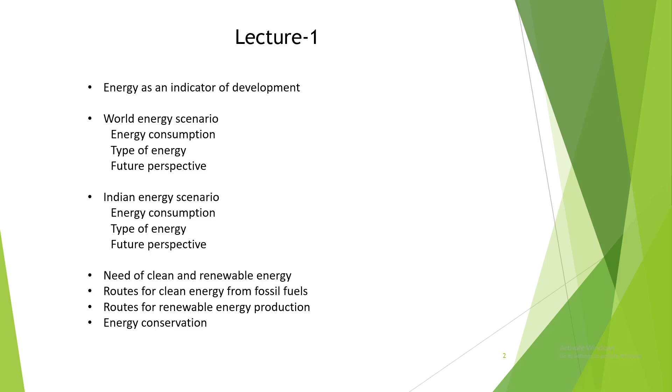Okay, if there's no doubt, then move to the second lecture. The second lecture majorly focused on coal as a basic energy source - its basic composition, origin, rank, energy content, and different types of coal such as anthracite, bituminous, lignite, peat, and their availability worldwide and also in the Indian market - what kind of coal is available in India, and how that affects energy production and electricity generation from it. Also, the different properties and pricing of coal, and finally the energy production perspective from coal. These are all discussed here.

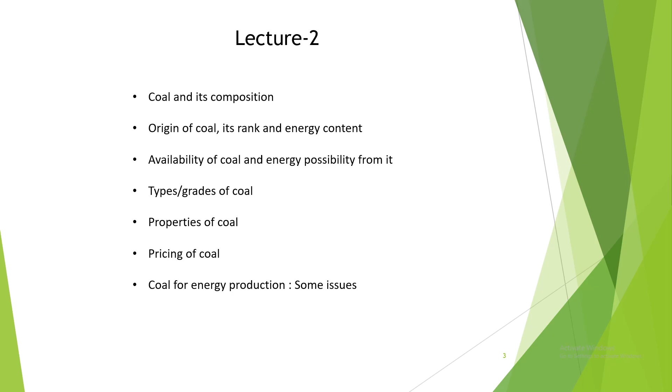Again, if there is any question, I'd be happy to resolve it. If not, then the third lecture was basically the characterizations, like the proximate and ultimate analysis of coal, and also the calorific value estimation of coal via a bomb calorimeter, with some numericals discussed. The proximate analysis gives us the moisture content, volatile matter, ash content, and fixed carbon, whereas the ultimate analysis gives us the elemental composition such as C, H, N, S, and O, the basic elements of a hydrocarbon. Also, for energy production from coal and electricity generation, we need to know how much energy can be produced from coal when burning it, so the calorific value or heating value estimation by bomb calorimeter experiments are also discussed here.

Furthermore, the fourth lecture discussed a coal-fired power plant, where there is combustion of coal and power generation, and also the overall plant efficiency - Carnot efficiency, Rankine cycles, Brayton cycles, these kinds of thermodynamic cycles are also discussed - and overall performance of a coal-based power plant, how to quantify it based on efficiency and based on energy production in terms of kilowatt hour, and then also some of the IGCC cycles, which are newer technologies. These are also discussed, along with some basic fixed bed and fluidized bed reactors and their process conditions and efficiency.

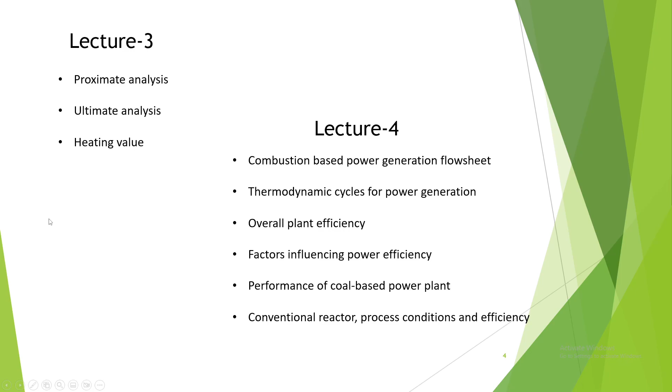Moving on, we'll discuss some sample questions, basic questions, which are also provided as assignment 0. The first question is: the Kyoto Protocol is related to what? CO2 reduction, solar energy, water management, or women empowerment?

Let's do this in an interactive way. What do you think it would be? Anyone? Yeah, it's CO2 reduction.

That's correct, this is very simple. The Kyoto Protocol is related to CO2 reduction, which is nowadays the basic theme of climate change actions, to reduce the carbon level in our atmosphere, which can be correlated to global warming. The target is to limit the global temperature increase to below 1.5 to 2 degrees Celsius.

The next one: in India, the cetane number of diesel used in trucks may be about what? 5, 14, 45, or 85? 45. Yes, the correct answer is 45. The cetane number of diesel basically shows us the performance of the engine.

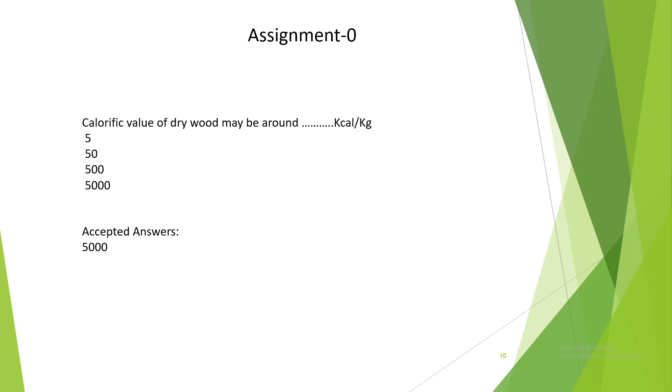Another question in chat: do we have to remember such calorific values? I don't think so, but for some basic ones it would be better knowing the range, especially for multiple choice questions, in a comparative way.

That's why I'm saying this, because the next question is: the calorific value of LPG gas is around what? 1000, 5000, 10,000, or 12,000? When comparing, it's actually far greater than dry wood. So it's not very mandatory to remember detailed numerical values; it's just a brief introductory way to know the basics of energy.

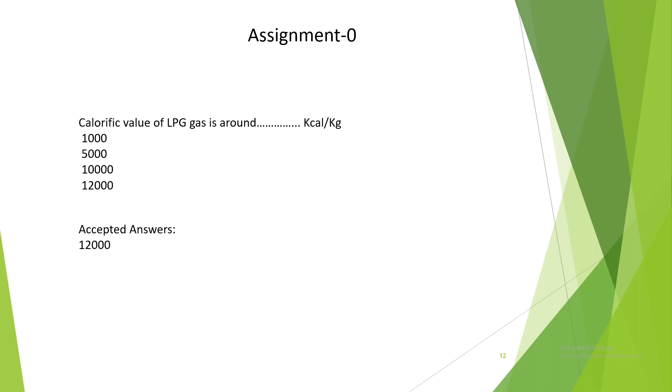Another question: which of the following is called blue gas? Coke oven gas, water gas, natural gas, or producer gas? Water gas. Yes, that's right. It's water gas, which is actually very important from an industrial perspective.

The LPG constituent gases, four options: methane and butane, methane and propane, butane and propane, or propane and pentane? Butane and propane. Yes, that's the correct one, butane and propane.

The next question: which of the following sources is responsible for maximum air pollution? This is based on pollution control board data. The options are industrial chimney exhaust, forest fire, automobile exhaust, or bacterial action. It might be a bit controversial, but it is what it is. What according to you would be the highest responsible thing?

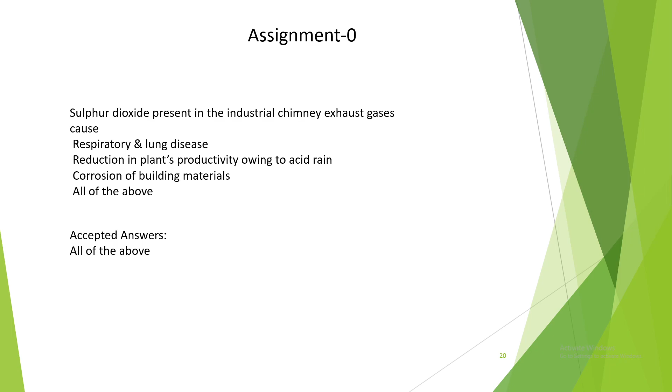The LED bulb consumes more than how much percentage less energy than the incandescent light? 50, 100, 75, or 25?

So the correct answer is 75% less energy consumption when using the LED bulb compared to the incandescent light. That is why, even if the capital cost or market price of the LED bulb is far greater than the conventional light, the longevity of these LED bulbs and less energy consumption are the main reasons why LED bulbs are getting more and more used everywhere, because overall the cost, and this energy consumption correlates with cost. So from an overall cost perspective and sustainable development point of view, LED bulbs are very good.

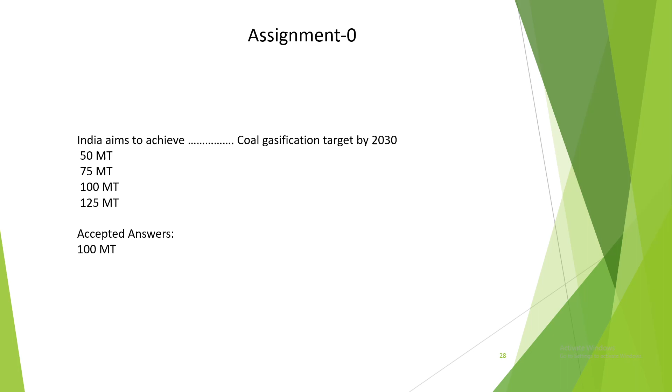The largest wind energy production state in India - is it Gujarat, Rajasthan, Maharashtra, or Tamil Nadu? It is Gujarat, the largest wind energy production state, in terms of overall renewable energy, also wind energy, along with solar energy, biomass energy, and tidal energy. It's a very important aspect, especially in coastal areas or windy areas at a certain height where you can see these windmills. So Gujarat has the largest wind energy production so far within India.

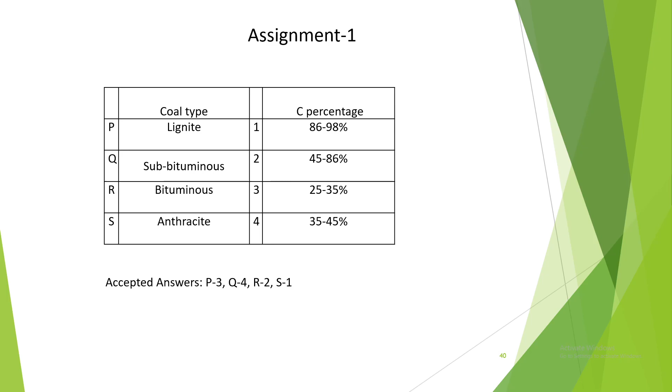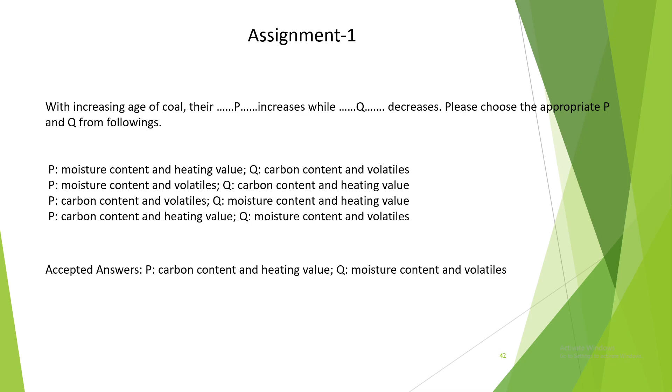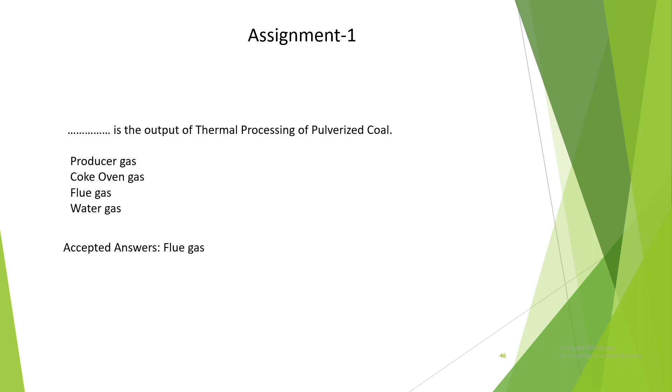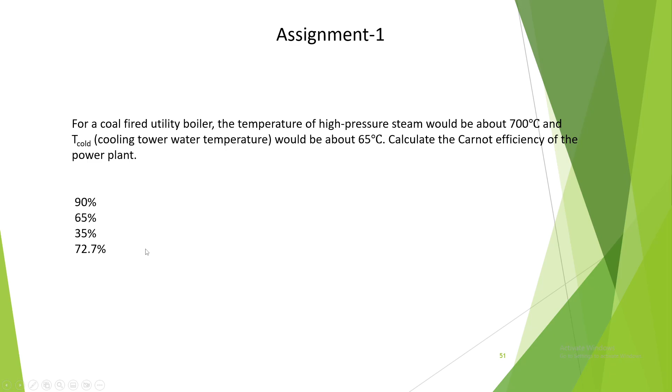So the correct answer is 65%, not 35%. You have to be very careful about converting both the cold and hot temperature to the respective Kelvin scales, and then simply apply 1 minus Tc by Th into 100%, and you'll get about 65% as the correct answer.

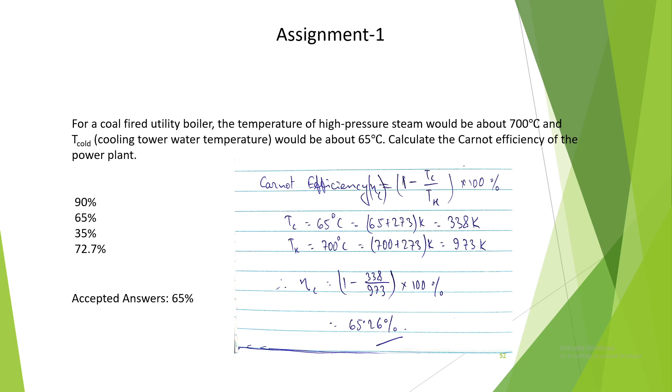Another numerical problem. If everyone is done with the previous one and there's no question on that, let's move to the next problem.

It's the calculation of the water equivalent of a bomb calorimeter, having a 1.5 gram benzoic acid sample whose higher heating value is given, with an overall temperature rise of about 5 degrees Celsius, and the acid titration required 12 ml of standard alkali. The standard alkali means a certain concentration solution, which you'll see in the lecture as a normal solution. Also, 8 centimeters of wire was consumed in that particular firing. We have to determine the water equivalent of the bomb calorimeter.

These kinds of practice problems, and also whatever you have in your assignments, are very important, even when planning for the final examination. So you have to be very careful about that. Please solve this problem, and then we'll discuss it.

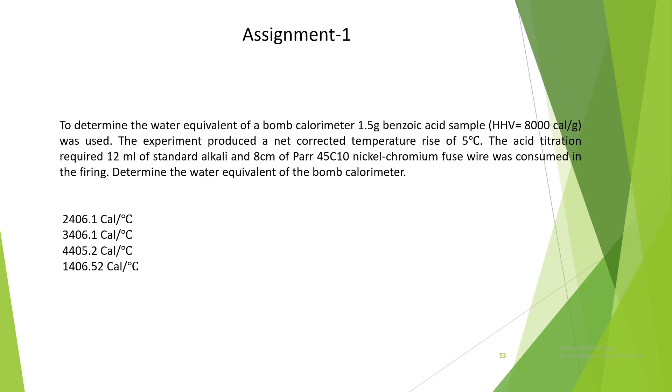Okay, so the correct answer is 2406.1 calorie per degree centigrade. How to solve this problem? This has already been shown in the lecture, but I'll explain again. Basically, when you are heating or combusting any sample in the bomb calorimeter, there is a temperature rise, sensible heat obtained by the bomb, and also some heat obtained by the water itself. So there is m*cp*delta T, m bomb into cp bomb plus mw into cpw, and overall there is a certain delta T, a certain temperature increase.

So this entire m*cp bomb plus m*cp of water is actually called the water equivalent. When trying to get the water equivalent value, we get this formula: higher heating value into the mass, plus E1 plus E2 plus E3, divided by delta T. Now what are E1, E2 and E3?

E1 is the HNO3 correction factor. Basically, if there is some nitrogen present, there will be some HNO3 formation, and we have to correct for that heat. Accordingly, if there is some sulfur present, there will be H2SO4 formation, so we have to get that H2SO4 correction factor too.

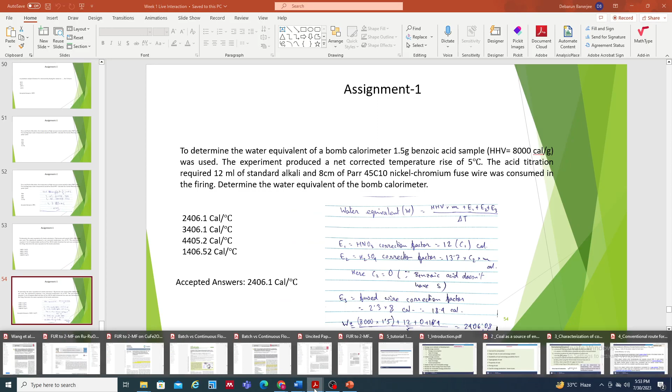So for nickel chromium fused wire, the factor we take is 2.3. In the lecture slide, this has also been shown - you can see the 2.3 is the factor for nickel chromium fused wire. When using some other iron fused wire, that would be 2.7, or for finer platinum wire, the E3 value would be 0.

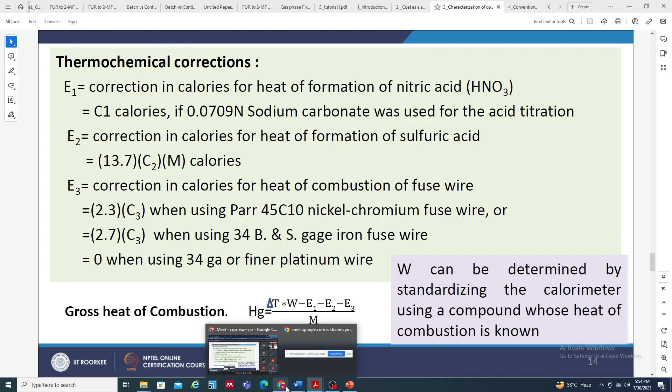So for nickel chromium fused wire, we use this 2.3 value as the factor, and 8 centimeters is the consumption of wire. So putting all these values into the water equivalent formula, and delta T is 3.077 degrees Celsius - don't worry about Kelvin versus Celsius here, because this is delta. So when calculating and putting in the value of delta, it's the same whether in centigrade scale or Kelvin scale.

Ultimately, you will get a value like 2406.08 calorie per degree centigrade. I wrote it wrong - it's not calorie per gram, it's calorie per degree centigrade.

Another question is that, if there is no doubt in the earlier numerical questions, we move on to another question.

Okay, I assume there is no problem in solving those numericals.

During a boiler trial, the coal analysis on mass basis was reported as carbon 62.4%, hydrogen 4.2%, oxygen 4.5%, nitrogen 0.4%, sulfur 0.2%, moisture 14.4%, ash 13.9%. If the ash molecular weight is 56, what would be the higher and lower heating value on as received basis?

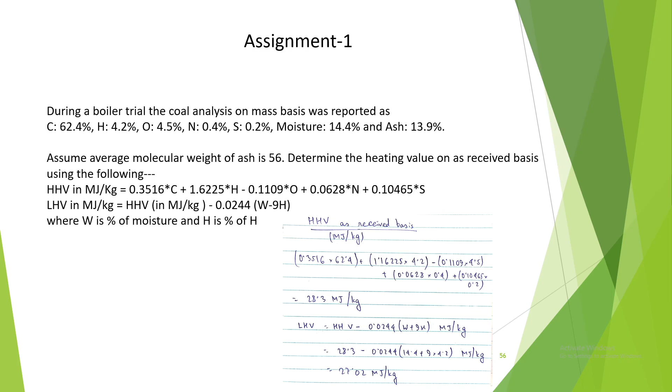If there is any doubt, please let me know. Okay, if not.

Some other problems which are actually discussed in the tutorial, similar kind of problems which I have already discussed. There is also the tutorial lecture on as received basis heating value determination, and an extended version which is the molecular formula determination of the coal based on the composition given.

When you're trying to get the molecular formula, you have to convert it to the number of moles using the molecular weight of the element, which is why the ash molecular weight needs to be provided, and that was given. For moisture, take the molecular weight as 18 as H2O. For sulfur, it has to be 32. Nitrogen has to be 14, oxygen 16, hydrogen 1, and carbon 12.

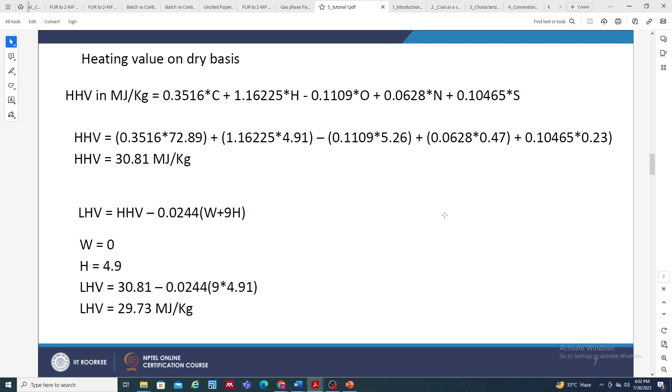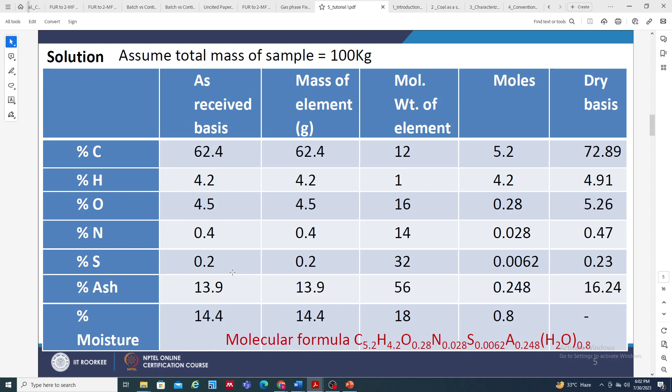I would like to also point out one thing, that in the problem there is this hydrogen coefficient given as 1.16225 in tutorial problem number 2. But if you put that value in when solving for higher heating value, you will not get the correct answer because it has been given wrongly. This extra 1 before the 6 has been added, so it should actually be 1.6225.

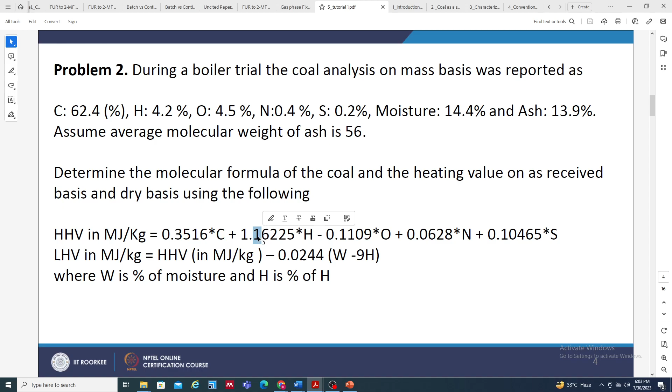Please remember this—it would be 1.6225 multiplied by whatever hydrogen value is there, instead of 1.16. This extra value is wrong, so it should not be there according to this particular tutorial problem.

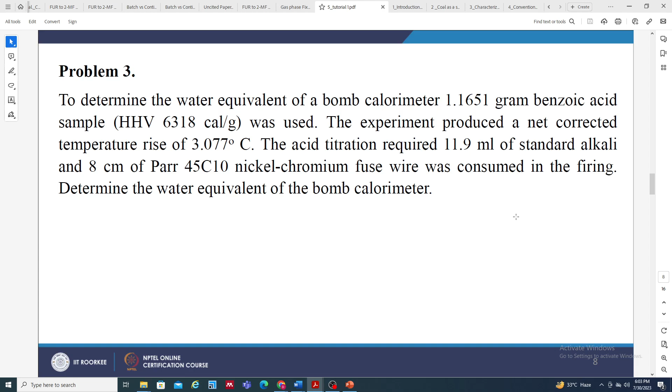And the water equivalent determination I have already discussed, how to address this kind of problem—similar kinds of problems you might expect. And similarly, the earlier one was based on the ultimate analysis, the CHNS analysis.

If you are given the proximate analysis of coal and its heating value, you might also be asked to convert it to different bases, like moisture free basis or dry ash free basis. Similarly, the basis correction would be there.

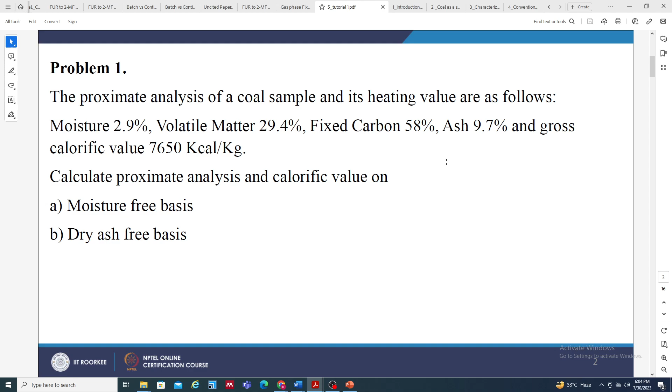So instead of 100, the basis would be 100 minus moisture, which is 2.9, for moisture free; 100 minus 9.7 for ash free; or for dry ash free, 100 minus both 2.9 and 9.7. Then you will solve it—it's very straightforward—and the similar factor has to be multiplied with the calorific value also, so you will get the calorific value in the different basis.

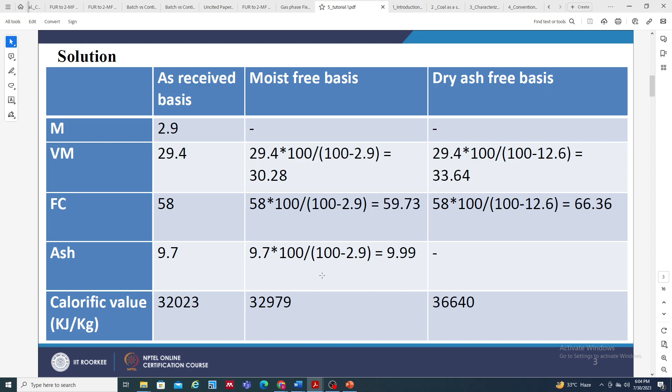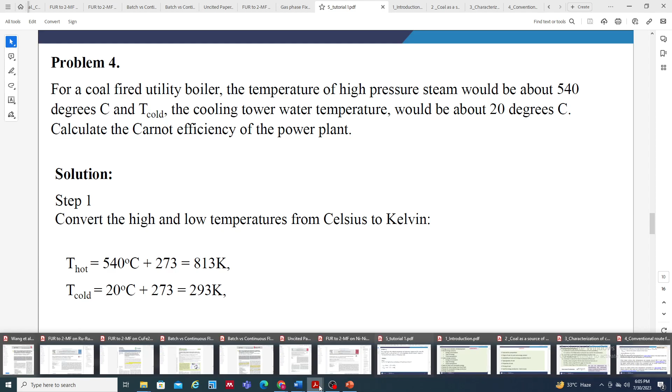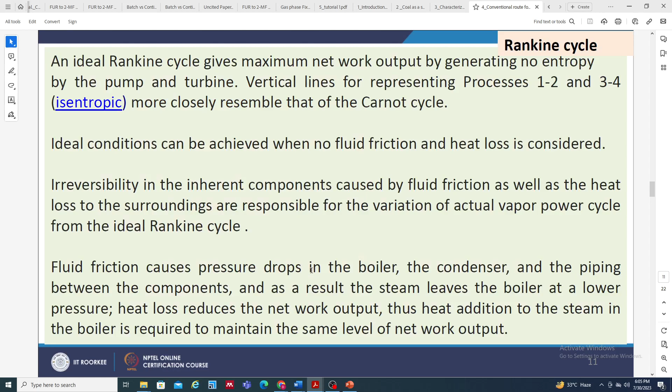And the similar Carnot efficiency problem was also discussed earlier. There might be some hot temperature and cold temperature provided, and you might be asked to calculate the Carnot efficiency. For the Carnot one, this is 1 minus T cold by T hot, the basic formula.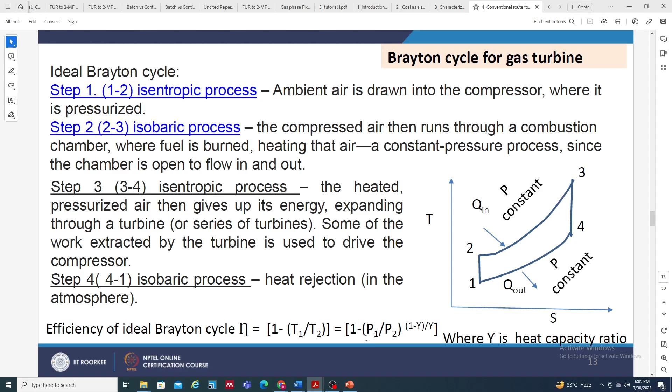For other cycles, such as ideal Brayton cycle, you might be asked to calculate this particular efficiency, and you might not be provided with the temperature, but might be provided with the pressure instead. In that case, the heat capacity ratio, which is Cp by Cv, would also need to be provided. Even with these values provided, you should be able to solve for the efficiency of an ideal Brayton cycle also.

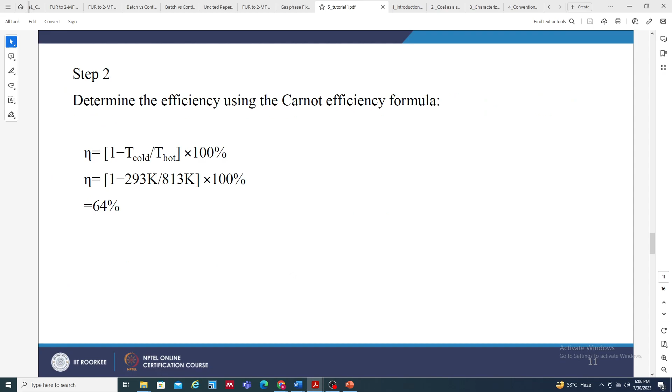Also, another tutorial problem discussed in this lecture was the fifth number problem, a very interesting one. It says that a conventional coal-fired power plant costs about a certain amount to construct with an efficiency of 34%, but if we construct an IGCC plant, it would cost more, about $200 per kilowatt extra, but for that extra cost we get an extra 11% efficiency. A certain heating value of coal is also provided.

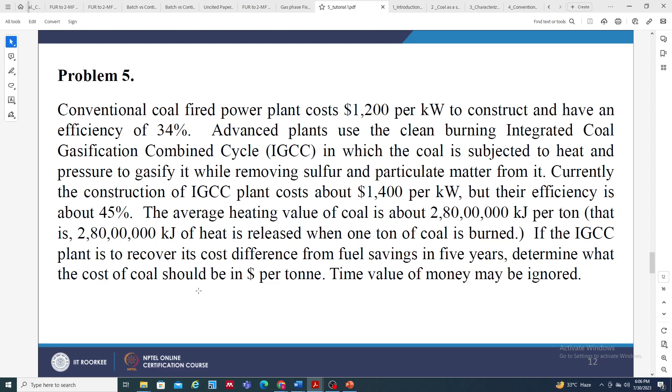So if we need to recover this extra $200 per kilowatt in 5 years, what should the cost of coal be, with time value of money ignored? We have to solve this kind of question.

For this 5-year period, we have to calculate: if both plants operate at full capacity for 5 years, what would be the total hours of operation? There are 365 days, with one leap year in every 4 years giving 366 days, so total days, multiplied by 24 hours since the plant works continuously, gives a total of 43,824 hours.

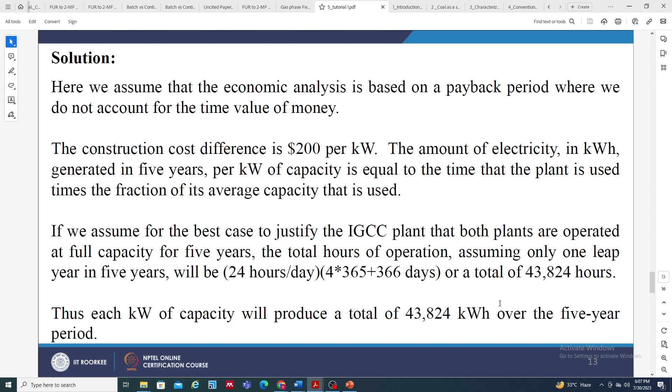This means for 1 kilowatt, the total production capacity of the plant would be 43,824 kilowatt hours. Then, for this kilowatt hour, if we get the mass of coal, it would be nothing but how much energy we're getting. This is the work done divided by the efficiency into the heating value of the coal.

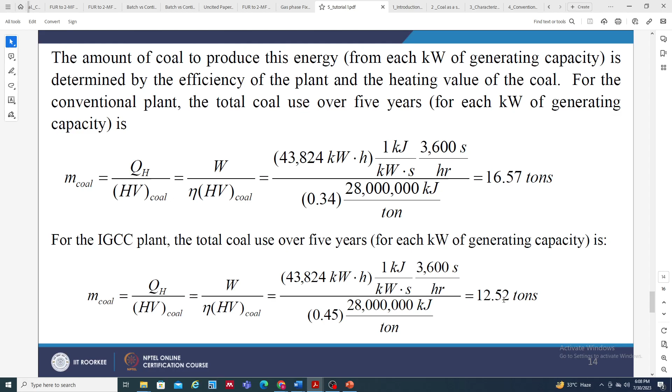For the normal power plant, the efficiency is lower, so with the rest of the parameters being the same, more mass would be required to generate the same amount of energy. Putting in all the values, 16.57 tons would be required for the normal power plant, and the IGCC power plant would require 12.52 tons.

This gives a saving of 4.05 tons over the 5-year period for each kilowatt of plant capacity. Accordingly, with a $200 difference in price between them, if we divide $200 by 4.05, it comes to around $49.37. This should be the minimum price so that you can recover the extra payment made to build the IGCC power plant.